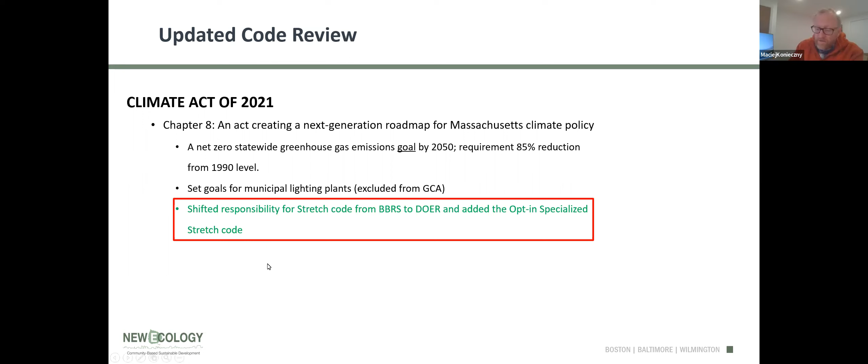And perhaps one of the most consequential shifts was that the legislation took the responsibility for the energy code from the BBRS, Building Regulations and Standards, to DOER, the Department of Energy Resources, and created an additional code. So those are the big components there. So in Massachusetts, in theory, now we have 3 energy codes. We have the base code, which is going to be updated this coming July, which is still part of BBRS, the building regulations. And that applies only to communities that never passed the stretch code, that never became green communities, which is about 52 communities.

The remaining communities, the 299, I think it might be 300 now, are part of the stretch code. And the stretch code updates automatically; it updated January 1 of this year for residential, and July of this year it will update for commercial. So without doing anything in the state, all stretch code communities will now be part of the new, higher performance stretch code requirements. And then it created a brand new code called the specialized opt-in code. Sometimes we refer to it as the net zero code. And it has to be voted on specifically by each individual town to adopt. And we'll get into

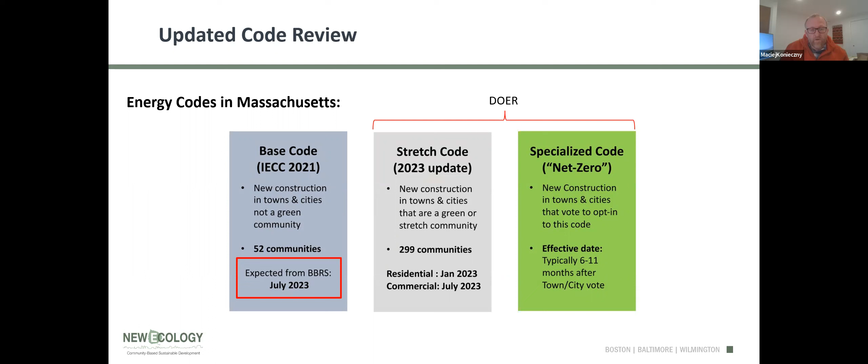exactly what those do. So here's a quick summary. The base code is going to be updated to the IECC 2021 without any changes really. The stretch code has some key modifications, including EV ready and solar ready. And then the specialized code builds on that, has a Passive House requirement for multifamilies, and also looks to electrify, really trying to push the shift from fossil fuel burning to all electric.

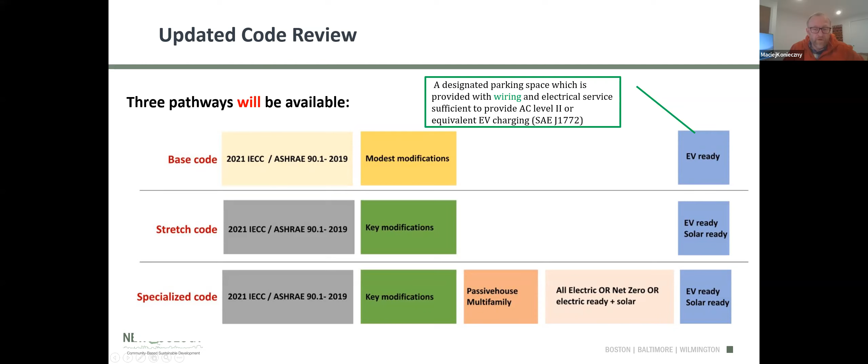So first I'll talk about the residential. So for the stretch code, there are 3 pathways. First of all, just to make sure everyone knows, this is again a lot of details, but generally we refer to the Massachusetts code as 780 CMR. Because it was shifted to DOER, it's a new reference, so it's 225 CMR, and 22 is the residential, and 23 is the commercial. So for residential, single family, up to 3 stories is what we're talking about here.

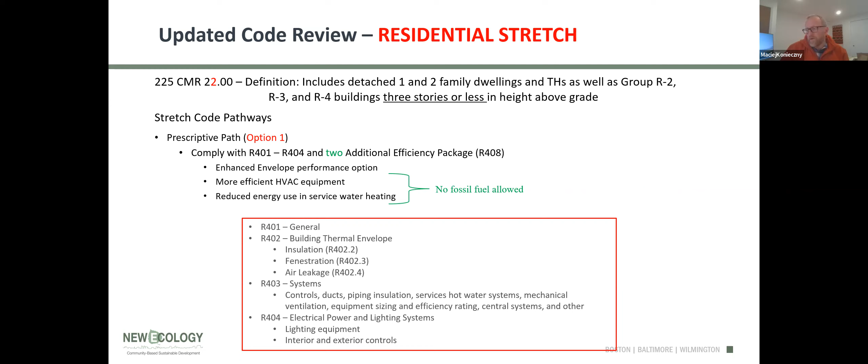We have the prescriptive path, which is similar to what it has always been. The big change there really is it requires some additional efficiency packages. So yes, you follow the prescriptive path, and then you have to make a couple other improvements. And for reference, all the information is there. Option 2 hasn't really changed that much. It is still an ERI, so a HERS rating.

It does add balanced mechanical ventilation and energy recovery, so that's new. So all buildings following this residential pathway will have to have an energy recovery ventilator at this point, and they do have specific requirements for those efficiencies.

And you are now not just required to be EV ready, but you actually have to wire for EV, right? So I guess you don't have to put in the actual charger, but your panel has to have the breaker, and you have to have the conduit and wires to where the charger will be installed. So really, it's trying to motivate you to install this.

And notice that the HERS scores will change and will depend a little bit on mixed fuel or all electric. So for mixed fuel buildings, it used to be 55. Come January 1st, it changed to 52. And then July 1, 2024, the HERS will be 42, which is a big jump. And you can see all the other ones. So there's a credit for solar, and there's a credit for all electric.

Okay. So quick, very key takeaways for the updated stretch code. We have reduced HERS scores, ERVs required, wiring instead of just EV ready. The Energy Star option was removed, so that's no longer an option. And then there's specific passive house documentation required to get your building permit and your occupancy permit. And additions and renovations are no longer exempt.

The specialized code, right there, this is a little older, but for the most part, I think no one really will get in before January 1st, but there are 4 communities that already passed it. We talked about that. So hopefully I'm good on time.

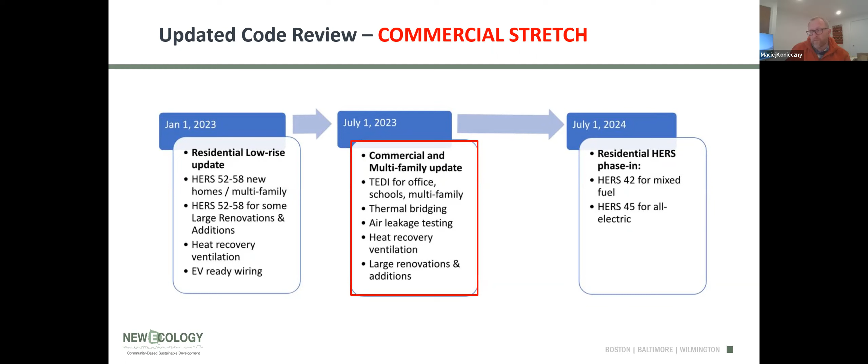Good. We'll talk a little bit about the commercial code. For the most part, for this audience, large multifamily, 4 stories or higher, becomes a commercial code. So the one big thing in commercial code that is completely new is called TEDI, which is the thermal energy demand intensity. So if you hear somebody talking about meeting a TEDI, this is what they're talking about.

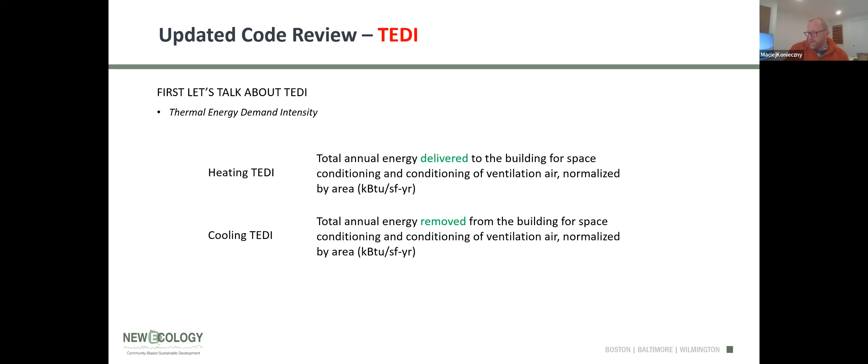And there are 2 different types. There's a heating and cooling TEDI. And essentially it represents a threshold, established by DOER, below which a building has to be designed, that shows that the annual energy delivered to the building falls below that. It's really focused on envelope and ventilation. Same for cooling, right? So here's a quick diagram that is right from DOER's presentation.

The TEDI is not an EUI, even though it has the same labels. It doesn't account for any efficiency of the heating equipment. It's literally how much energy you need in the building to counteract the exterior conditions. So if it was gas, this value would be 90%. If it's a heat pump, it's 320. It takes that out of the equation, and it really says, with my nice envelope and great energy recovery ventilation, is my heating TEDI in BTUs per square foot per year below the threshold that it needs to be.

So it's a new way to measure performance of buildings. I think it originated in Vancouver. It's used currently in Toronto. So it comes mostly from Canada, but it is a great way to make sure that your envelope is in a good place. These are just the values. I don't need to go into it. The goal is really to significantly reduce the heating component, right?

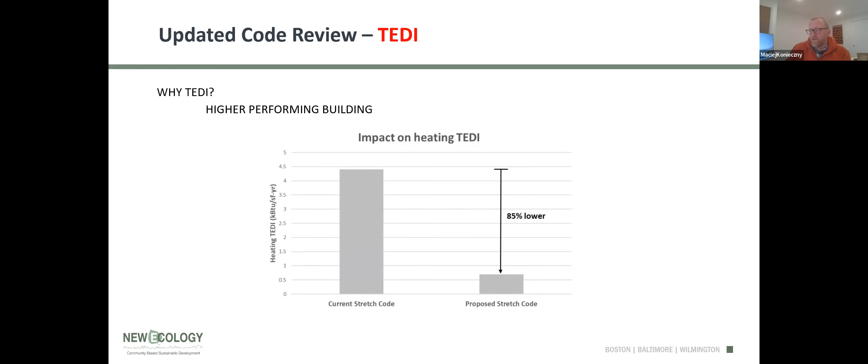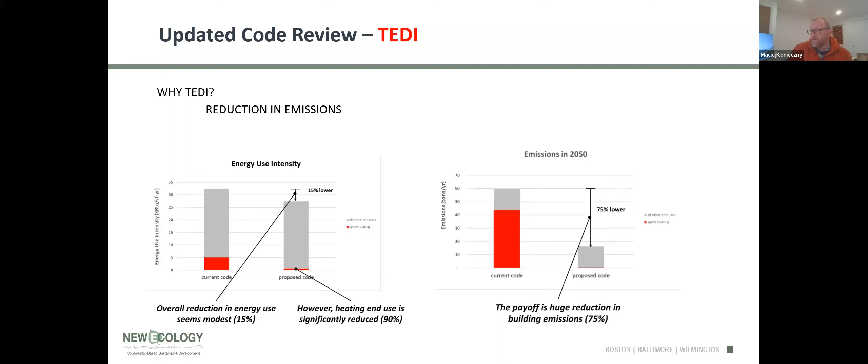As the grid gets cleaner, the emissions improve, except the percentage of your emissions coming from the building, coming from fossil fuels, increases. So if you can eliminate that, which is what we're doing, we're then really reducing emissions by 2050. And that's the purpose behind this. Anyway, so this is one of the pathways now.

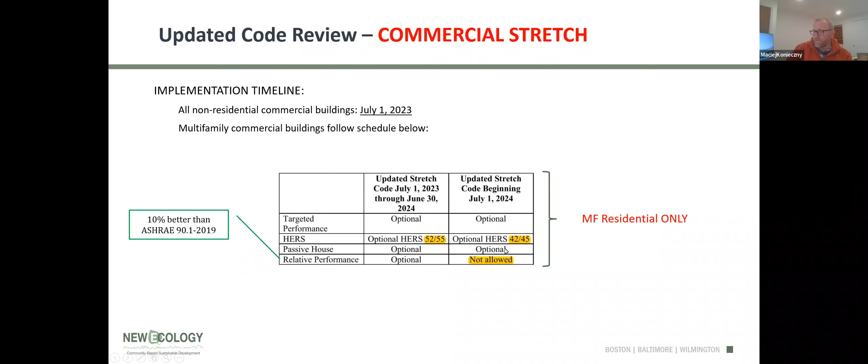So this commercial code starts in July 2023. This is very similar to residential code for commercial residential buildings. You can see it's only multifamily, and it essentially says right now we can have targeted performance, which is TEDI, that's automatic. Then we can have HERS, passive house, and then ASHRAE modeling, which is the EQuest modeling. So this EQuest goes away with the specialized code, and I'll talk later. The optional target performance also goes away, and you're really left with passive house. So we'll get to that.

Okay. Maciej, your sound just goes in and out a little bit. Sorry, maybe I'll speak more to the speaker. Is that better? That sounds good right now. Okay, yeah, thank you. Please interrupt me if I'm not speaking well.

Okay, so really there, again, several options. Go back where we were. In the commercial code, we have prescriptive compliance, which residential buildings cannot follow under the commercial side. So if you have a multifamily building that's 4 stories or higher, whatever the size, you cannot do the prescriptive path. That's not allowed. Targeted performance, that's the TEDI. That's what we talked about.

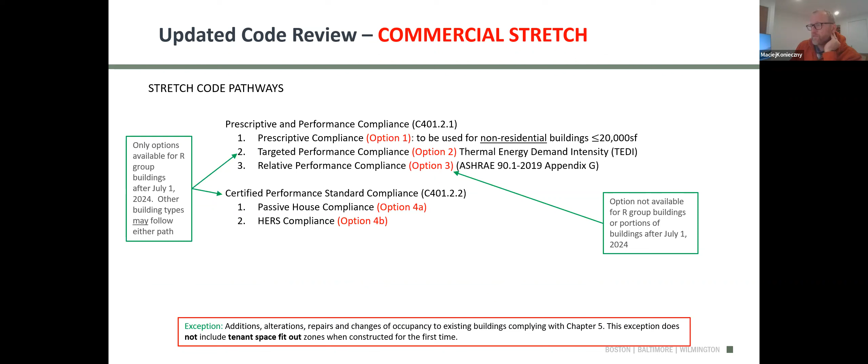And then the relative performance is the ASHRAE, this sort of classic large building EQuest type modeling that provides a baseline and a comparative model that tells us whether something is better or not. The original stretch code had a 20% improvement over baseline. The newest one has 10% improvement over baseline. Baseline has shifted up. It's much more aggressive. And then we have certified performance. We always have passive house or HERS compliance option. Lots of conversation here.

But generally, the TEDI option specifically lists these types of buildings: dormitory, fire, police station, library, office, school, post office, and town hall. These must follow the TEDI pathway. Other buildings can do it as well, but don't have to. Note the big distinction here is the ventilation rate of the buildings, and that was the way to address lab spaces and high ventilation buildings. So if on average your building is less than 0.5 CFM per square foot, which is all residential buildings, then you follow this. If it's higher, then you can do other pathways.

So in July, if you don't do specialized code, then residential buildings must use this, or they can be passive house or HERS compliance. For the most part, it'll be passive house. We've done several models now to try to figure out how strict the TEDI requirements really are. We just modeled a passive house pre-certified building through TEDI, and we had a very hard time passing. So I think the way the guidelines are listed right now, it'll be easier to pass compliance using passive house than using the TEDI pathway.

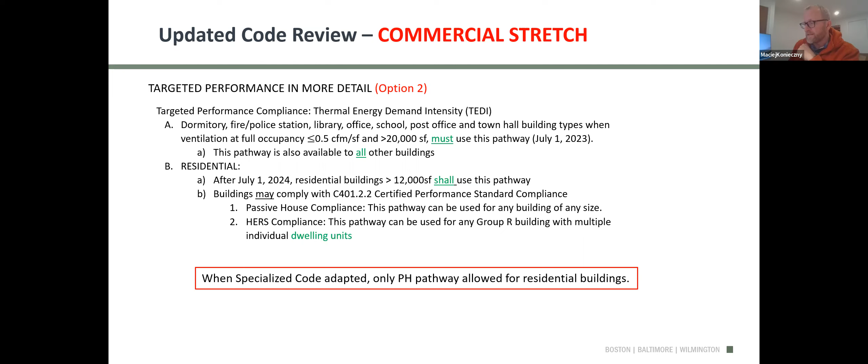There's still a lot of discussion of what the requirements will be, and I think there'll be new guidance coming out of DOER in the next, let's say, 4 weeks. We're submitting comments to them right now on this, along with several other design firms. But for now, the TEDI pathway seems to be more difficult than a passive house pathway. So that's a little bit of a surprise maybe, but that is where we are right now.

And then this is what I said, the ASHRAE model, the Appendix G. You can see it specifically applies to the high ventilation buildings, greater than 0.5 CFM. So lab spaces are the big ones, really. Performance spaces or something like that would fall under this pathway, and multifamily cannot use this anymore. In the past we could. Sometimes for over 100,000 square foot buildings under the previous stretch code, we were required to use that, but now we will not be allowed to use that at all. So this really applies to larger buildings, non-residential buildings, or buildings that have what's called high ventilation rates.

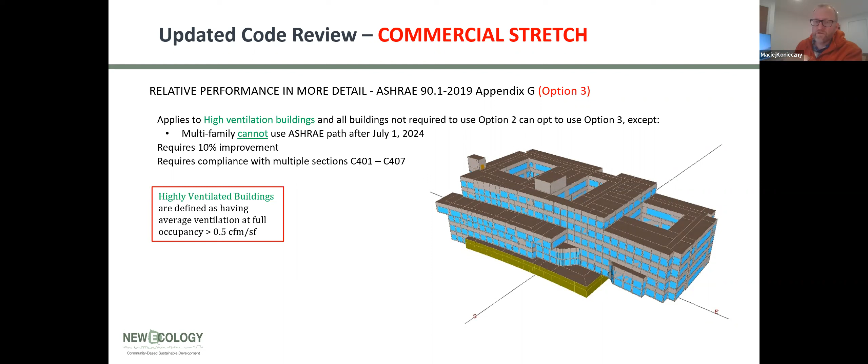So the key modification in these codes: a thermal envelope certificate is required and must be posted in the building. So that is essentially saying you need to test your buildings. No commercial buildings will be allowed to get a certificate of occupancy if it has not been tested.

And the thermal envelope certificate also has to display R values for the windows, for the walls, for the roof, stuff like that. So it is meant to be really a reminder of how the building was constructed in addition to the testing result. Again, maybe not applicable to many residential buildings, but with glass towers, there's always been a way to get around these curtain wall systems.

Now there's what's called a curtain wall backstop. And the basic premise you've got to pay attention to is that the overall U value must be less than 0.25, which doesn't seem like much, but considering where we were, it's a big jump. So you can't now have a really, really good roof and really poor windows. There's a minimum performance of these systems that is going to be required.

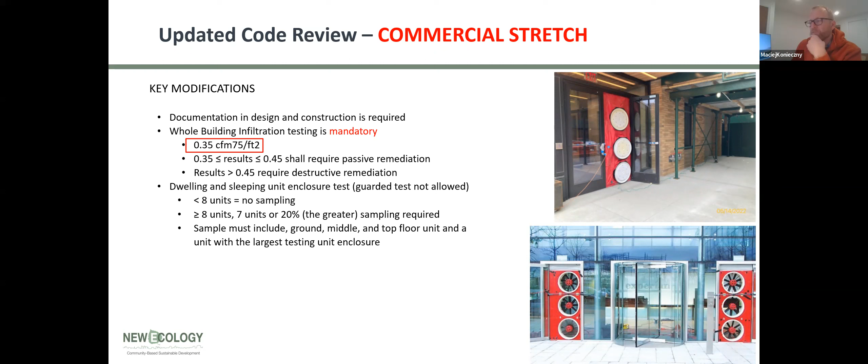Testing is now mandatory. Like I said, it's not passive house level. Passive house equivalent, by the way, is 0.08 CFM75 per square foot of enclosure, but it is, again, a big step. Getting into details here, you're allowed to try to fix it if it's between 0.35 and 0.45 without destructive measures. And then if you fail it, then you have to remediate it. I talked about sampling. Sampling is what we use all the time. That's part of the HERS RESNET protocols, essentially. So we're there.

Energy recovery ventilation, mandatory. You cannot have a building now that's exhaust only or natural ventilation. That is no longer allowed. And it provides minimum efficiency because there are many different types of ERVs out there. So it basically says that you have to meet a total efficiency of 75.

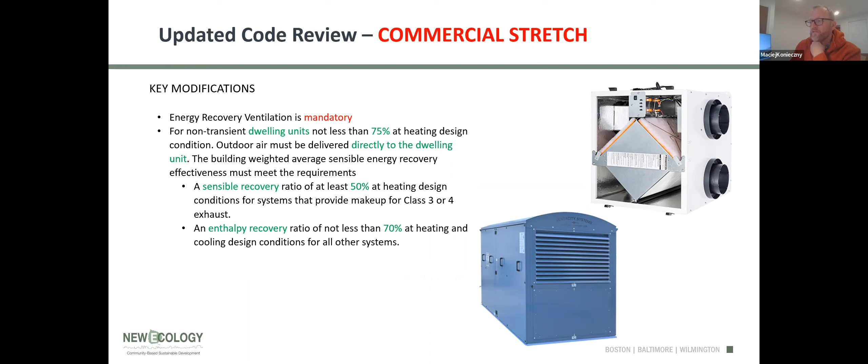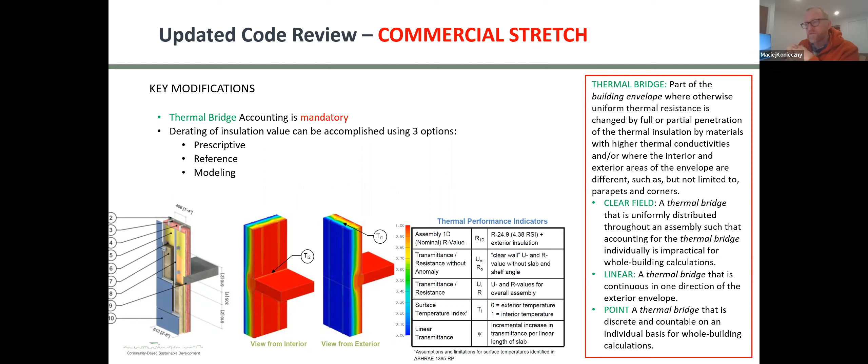Thermal bridge accounting, that's another one. There are many ways of doing this: prescriptive, modeling, using reference, but the basic premise is that every thermal bridge now has to be accounted for. So when you're doing your TEDI or your passive house, all the different linear thermal bridges and point thermal bridges must be accounted for. That is great because that is one place where there's a ton of heat loss. And so that is now required.

EV ready requirements are mandatory. So in residential group R buildings, 20% of the spaces must be EV ready, and for all others, 10%. And then there's the installed component versus just EV ready. So you must have installed wiring for a level 2 charger for those 20% of spaces. In theory, you don't need a charger at the termination of that wiring, but really, why not at that point, I think is the way this was designed. So in practice, 20% of residential building parking lots now must have EV charging stations.

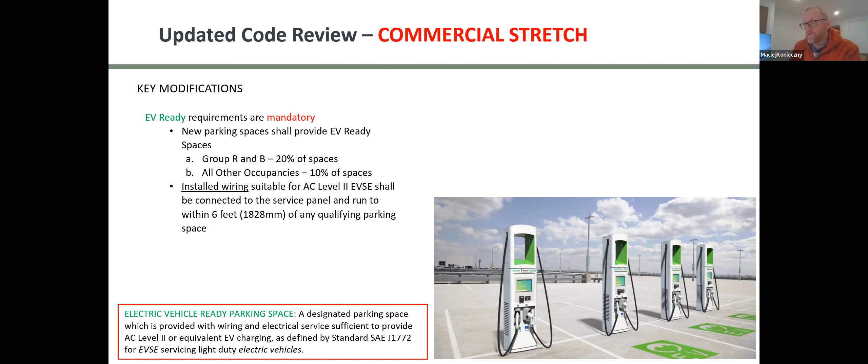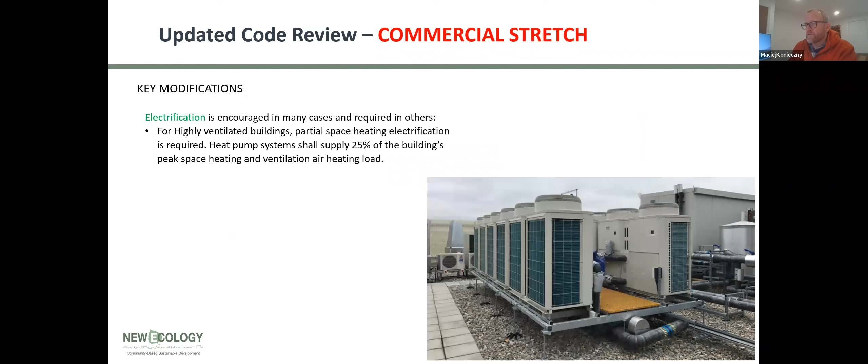So electrification is very much encouraged throughout. You can see that with the idea of wiring for future changes, there are requirements to design in order to get a building permit. If you're using fossil fuels on site, you have to have a separate set of drawings that will actually design the equipment, the capacities and the spaces for future replacement. Yep. So there's definitely a very keen focus on electrification, even if it's not absolutely required, which it is not.

And just keep in mind that commercial restaurants and generators are exempt from the electrification component. So if you have a commercial kitchen with gas, those do not count as mixed fuel. Neither do generators, which might be gas fired or even oil fired. So those are exempt from electrification.

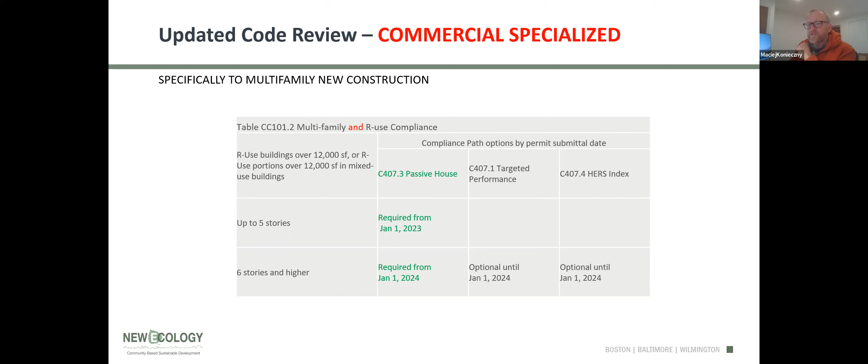Very similar, just a slightly different time frame. You can see 4 and 5 stories. So again, we're in the commercial. Every 3 stories and under is residential, 4 stories and higher is commercial. So 4 and 5 stories, we are now in passive house requirement, January 1, 2023. And then 6 stories and higher will come into play January 1, 2024. So this is the commercial specialized code. As soon as somebody passes this code, after the 6-month wait period, up to 5 stories is going to be passive house. And then starting January of next year, it'll be all residential buildings.

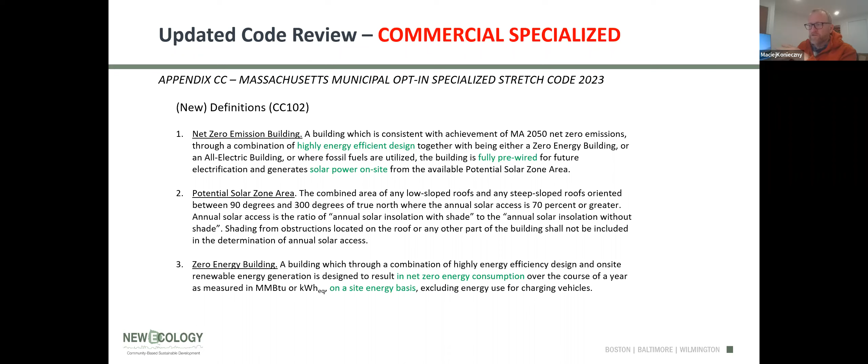I don't think I need to read through this, but there's also some new definitions in the code that help clarify what's really required. So

Specialized code pathways are very similar to residential. So essentially, the zero energy pathway in theory allows gas, but again, you have to offset both gas and electric use with solar. So you're generating more than you're probably using on site.

That's probably not a big deal if somebody has a very strong feeling about gas cooking, but it does become a big deal if it's domestic hot water or heating that's gas fired, because that's a big load and you would have to offset quite a bit of that with PVs. You could not monetize that PV unless you sort of schedule Z to another user. But that is an option.

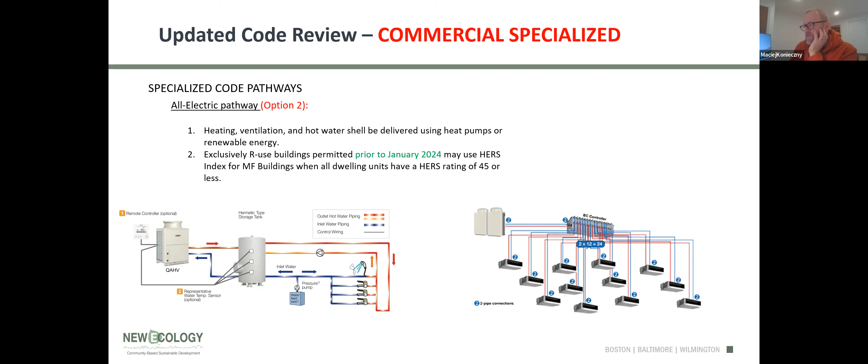Mixed fuel pathway, a few things here. Biomass is considered clean. So if you have a biomass boiler for some reason, that complies with this pathway. It does require solar, and it tells me right there 1.5 watts per square foot of the gross area of the 3 largest floors. So if you have a footprint of 10,000 feet and 20 stories, 1.5 watts times 30,000 is what you'd be required to put on the building. So that's a pretty significant requirement.

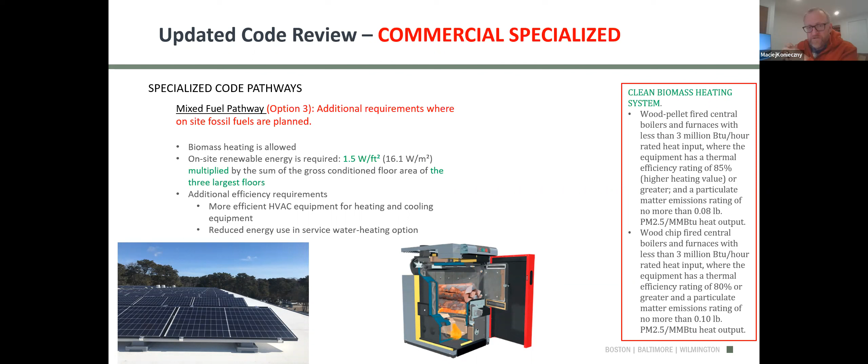Your systems have to be more efficient. So again, the code in section 406 has the requirements for additional efficiency measures. And so there are additional requirements there.

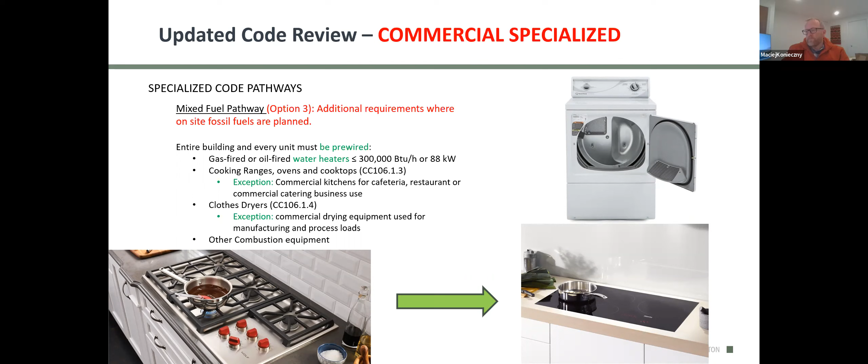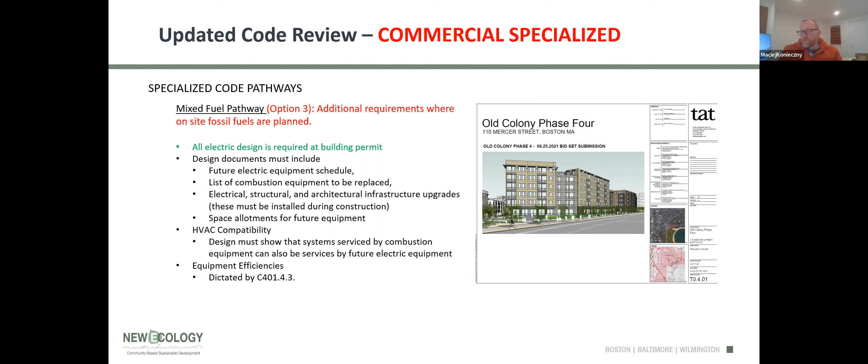And I think I mostly said this already. So I think that's it. How did I do? I was trying to go pretty fast. All right, 35 minutes. So that's it on the presentation. I know there's a lot there. I'll make this available so you can read into the details, but I'm happy to answer any questions.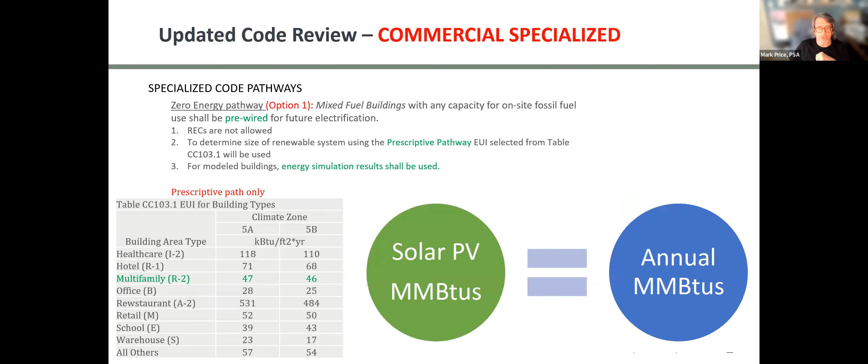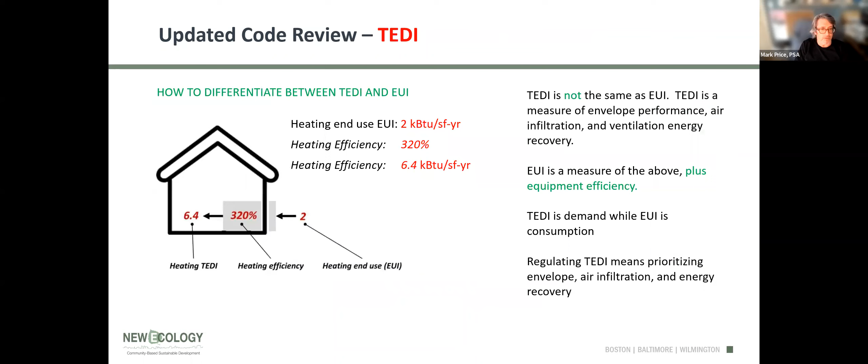Yes, absolutely. Thank you. So I'm inquiring about the residential code, whereby if you put an addition on a building that is greater than 1,000 square feet, you must also consider the primary systems of the existing home, being heating, cooling, ventilation, air barrier, windows, etc. I just want to make sure, that was a little glossed over in the beginning, and I want to make sure that we address that. Yes. Let me get back to that one.

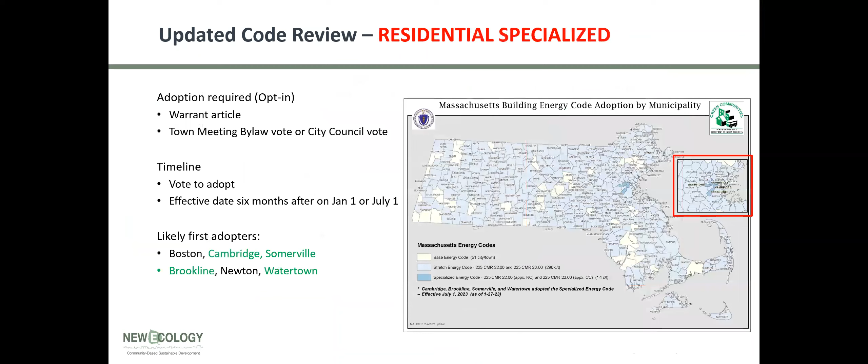And a HERS score can only be applied to the definition of a dwelling unit, which includes bedrooms, bathrooms, kitchens, and all of the functions of daily life. So any addition of 1,001 square feet triggers a renovation of the existing home. Looks like Ian has an answer to this question. Yeah, sure. I can take this one, and good to hear you, Mark.

Yeah, so this is worth highlighting and flagging, because I think it's going to be significant for, I would say, mostly affluent homeowners, but still, it's going to catch a lot of builders by surprise, and we need to get the word out about this. But Mark is right that that table at the bottom is showing a HERS rating requirement if you trigger either an addition that's adding more than 1,000 square feet or an alteration that's renovating more than 50% of a home and also adding more than 1,000 square feet. So in those two situations, essentially you have to do a HERS rating on a dwelling unit.

Now, if your addition is adding an accessory dwelling unit, like an in-law apartment, then it's reasonably straightforward. So you do the HERS rating on that new unit. And we think that's good public policy to make that an attractive option. But if you're just expanding an existing unit to make it a larger unit, so adding over 1,000 square feet to an existing home, then that's pushing you to do the HERS rating on that whole home, and that's likely going to need some complicated set of additional measures on that existing home to hit that HERS rating.

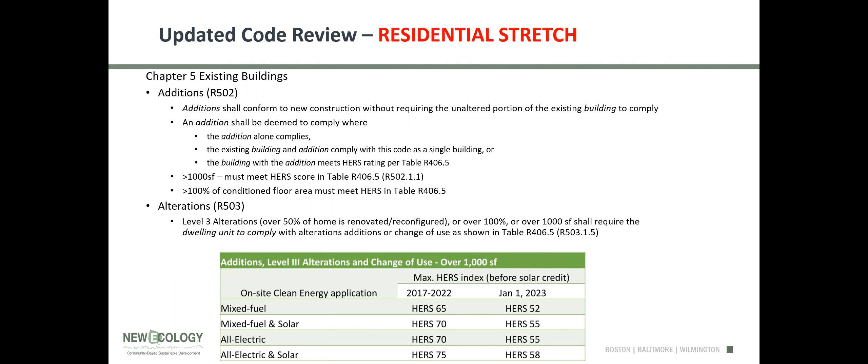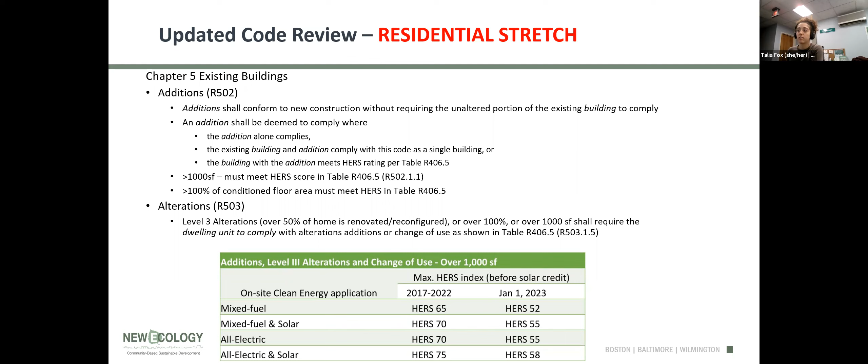I wasn't sure if you wanted me to ask my question out loud, but it's basically just what's in the chat. I'm a little confused about the solar requirements in the case of a larger than 4,000 square foot residential mixed fuel home. It sounds to me like if a builder were choosing the HERS or Phius ZERO option that they would have to put enough solar on to match the energy consumption on site. But if they couldn't do this, like if there was shading or what have you, it seems like that might not be an option in this case particularly, although I know in other situations there are some exceptions for shading. So would just love some clarification there.

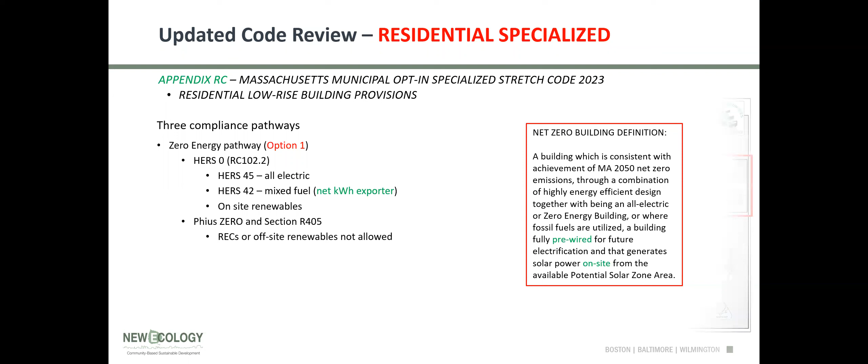So there are exceptions for shading here as well. If your roof is more than, I want to say 60% shaded, sorry, if the solar is less than 60% available, Ian, is that right? 60%? I think it's 70. 70, or you're not oriented in the right direction, then that requirement goes away. Yeah, so it's meant to do that part. I think and then the solar requirement is in the specialized code, sometimes, and not in the base code. Just go back to that.

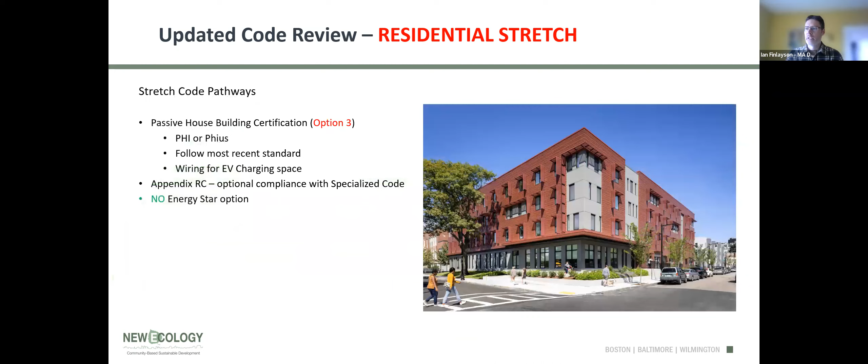Yeah, maybe I can just add a little bit to that. So it's only the specialized code where the over 4,000 square foot home kicks in. And the idea is that for homes that are mixed fuel that are less than 4,000 square feet, they have to install a 4 kilowatt system. But over 4,000 square feet, we think a 4 kilowatt system is too small to meet the needs of that home. And it's generally going to be more feasible to get to HERS 0. And what size system you need to get to HERS 0 is going to depend on the home and also how the architect is designing the roof and so on.

But typically you're looking at more like an 8 kilowatt system, which is about the average installed residential system size in Massachusetts. So what we're saying is those larger homes really have the opportunity to get to 0 if they're not shaded, and they should do that. Whereas smaller homes, it's a lower solar requirement. Right, that makes sense. I guess I was thinking of a scenario with a larger home where there was shading. It sounds like the builder could just get out of that requirement and build a large mixed fuel home. That was my concern, I guess.

Yes, no, that is allowed. We do want to encourage sites with shading to still get used, whether they're shaded because they're infill developments or they're shaded because there's mature trees. Those are both good things from a public policy standpoint. So we do allow that exception. Okay, and is it just they have to then put as much solar as is feasible in that circumstance where there is some shading? If they're shaded more than 70%, then they don't have to put any solar. Okay. If they're shaded less than 70% but can't get to HERS 0, then I don't think we have clear guidance, but we can maybe add that.